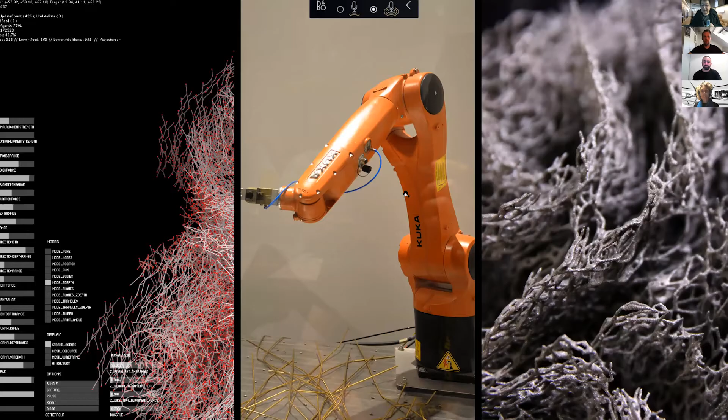So I'm going to discuss the relationship between algorithmic design processes, robotic fabrication, and the intricate architecture that this can generate. I'll look at this through the work of my practice, Studio Roland Snooks, as well as the lab at RMIT. But to begin with, I want to frame this briefly in terms of its relationship to the current pandemic and its fallout. So while I'm fairly skeptical that the pandemic will have a significant lasting impact on architectural design and fabrication, there are perhaps two implications of the coronavirus situation that are relevant to this work.

One is that the pandemic has highlighted the need for flexible manufacturing, and we can see this in the way additive manufacturing has been employed to print PPE or ventilator parts. And secondly, the disruption to supply chains. So this is emphasizing the importance of local manufacturing and distributed production rather than a dependence on international logistics. So both of these implications are going to create a renewed focus on advanced manufacturing and in particular 3D printing, and perhaps help to establish the conditions to accelerate the adoption of these tools within architecture and building construction.

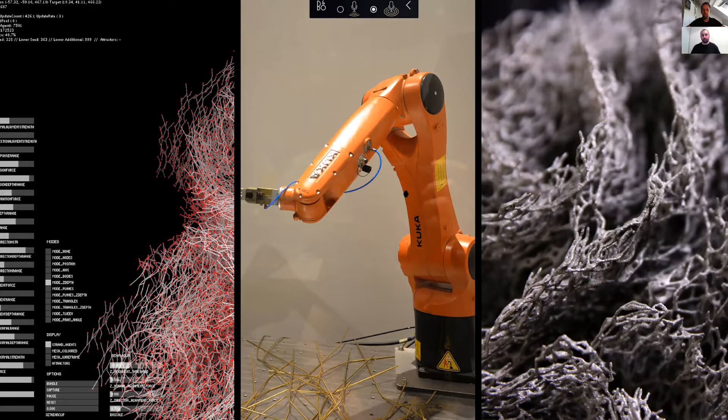So I want to just, within that framing, jump into the work, and I'm going to try and take a really fast section or slice through my work and try and describe the relationships. So methodologically, my work is based on a generative design approach that I describe as behavioral formation. And this is something which draws upon the logic of swarm intelligence and operates through multi-agent systems. And so this is an approach in which design intention is encoded into individual entities. I describe them as agents. And through the interaction of these agents, design intention self-organizes and it leads to emergence of architectural form, structure, and tectonics.

So in particular, one aspect of this that I'm going to talk about today is an algorithm I describe as an agent body algorithm. And so this is effectively an agent which then connects to other agents through a series of limbs. And in doing so, creates continuous lines of structure, ornamental effects, and structural networks. In doing so, this is an architectural design approach which creates intricate geometries which are neither really surface or network or volume, but can really be described as something which is like a thick fibrous mass.

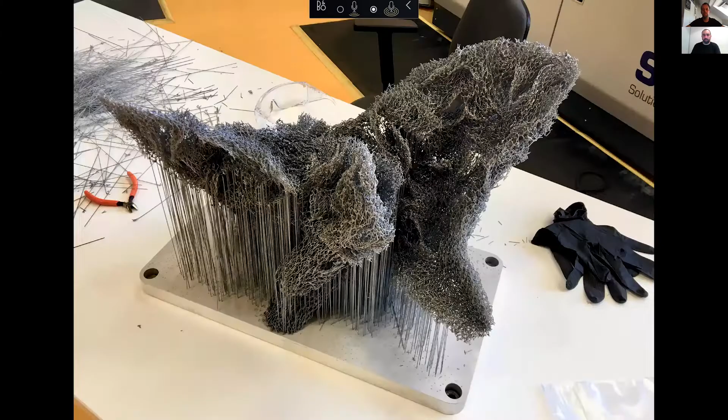And the creation of these in physical material is something that's very difficult. So at a small scale, perhaps we can print these directly. So this is an aluminium print where it's only about 600 mil across. Each element is only about 0.5 millimeter in diameter. It's over 1 million of those small elements. And it creates a series of different effects at different scales. This is a very small project we produced for the Pompidou Centre about 2 years ago. But it's part of an algorithmic inquiry we've been working on for almost 20 years.

And these particular geometries, we've been trying to figure out ways of building them for the last 7 or 8 years. And so what I want to do today is sort of show this cross-section for a series of techniques for designing or fabricating these geometries. So firstly, we started looking at these in terms of composites and the way we could compress surface, structure and ornament into a single irreducible whole, where they're interdependent. And in this case, the network of agent bodies became the sandwich material within a thin fiber composite. We did this on several projects at a series of different scales, using a number of robotic fabrication techniques, as well as more traditional boat building techniques like this fiber layup technique.

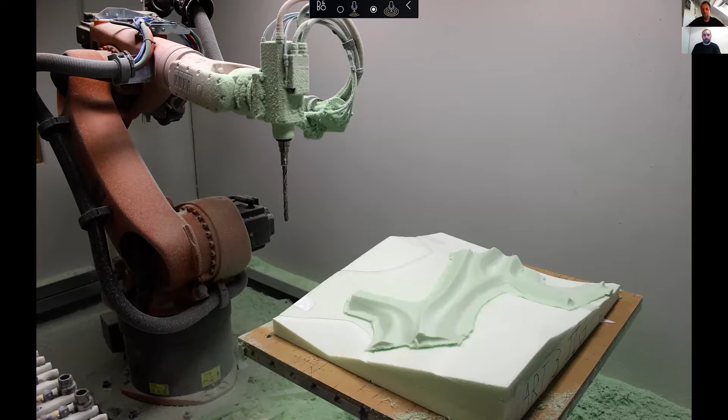They were quite complex and difficult ways of building something. We've also explored simpler ways, like using flat sheet material, which has been laser cut, and then using it to find its own form. And we've also attempted this in things like fiber composites, where we're looking at the way you can make a fiber composite without a mold.

Now, in this progression of projects, we've gone from something that was thick and fibrous down to something which becomes very thin and lightweight. So an alternative trajectory we're looking at is the way we build these agent bodies, or the lines of these agent bodies, through robotic rod bending.

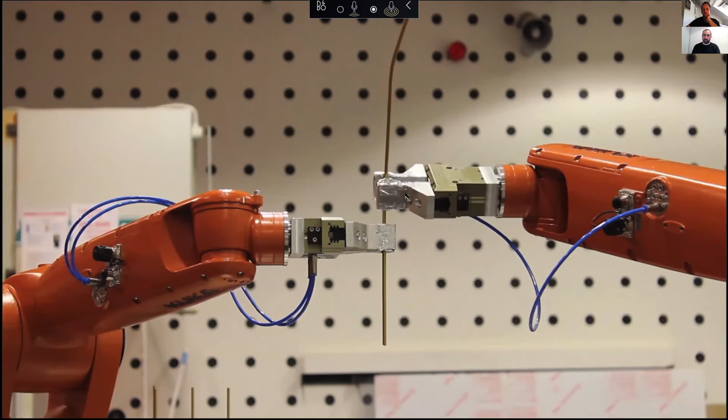And what became interesting to us in these projects was we're working with a very volatile algorithm, which is hard to refine because of the level of population it works at. So what was necessary is to understand all the constraints of the robotic processes and then build those into the algorithm, so you know that whatever the algorithm generates through this wild and volatile process, it's inherently going to be buildable within this fabrication process. So this second strategy was really looking at building lines.

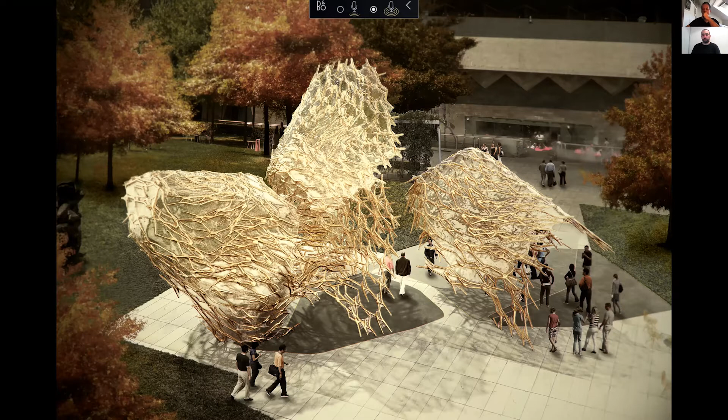So we had these two alternative problems. One dealt with surface, but no fibrous mass, and the other was all fibrous material and no surface. And it wasn't really until this project that we tried to bring those two things together. And in bringing them together, we realized that we needed to develop a different type of construction process for it. And so this is when we started looking at large-scale FDM 3D printing, and that's what I'll focus on the rest of this short presentation.

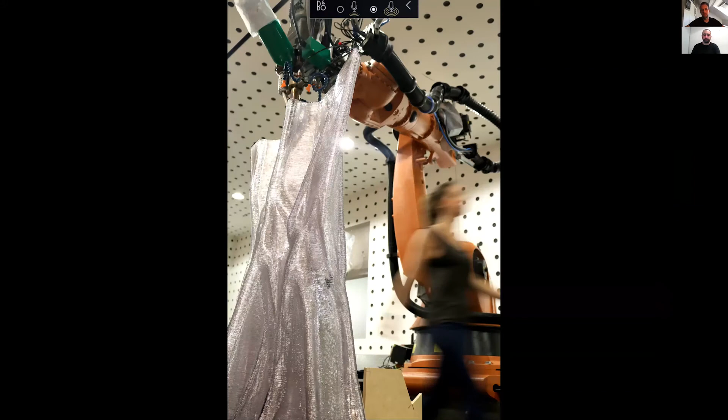And it was really a shift in the way we think about the production of this. So it was a shift from building the network of agent bodies and then trying to skin it, to printing a skin which we then cast a fibrous network into. And so in this case, we're casting fiber reinforced concrete back into a series of prototypes, both within skins and ones which were just simply networks, and testing that through a whole series of projects.

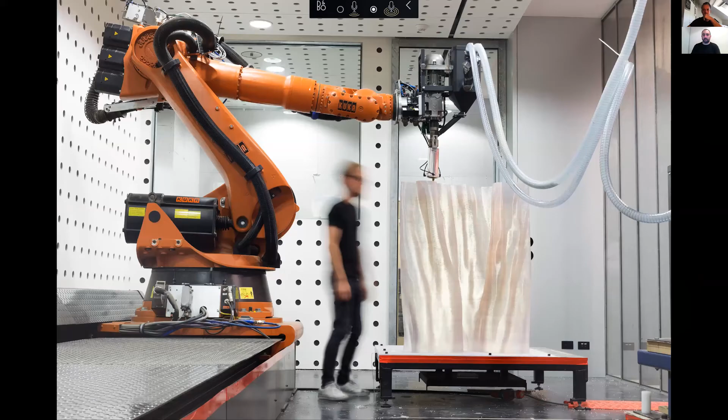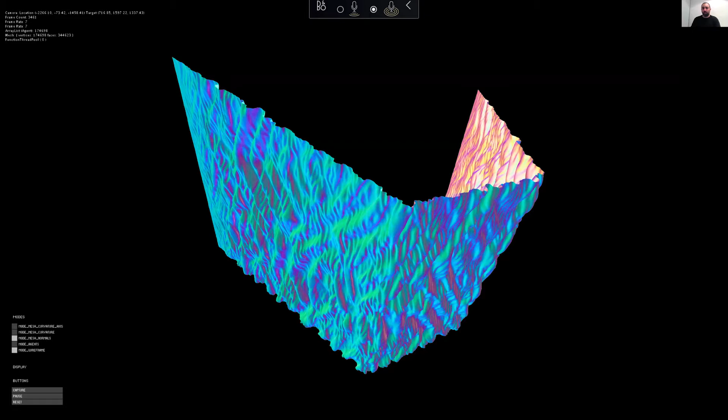But this is not really the type of geometry that large-scale 3D printing has a bias towards producing. Large-scale 3D printing inherently wants to be producing a continuous line, a continuous surface, so without a change in topology. So with that in mind, another set of projects were developed in which we were looking at a continuous surface, in this case a surface where each control point is an agent. And through the interaction of those agents, we get this rippling or corrugation.

And a lot of the challenge of building this particular project, which is out at Monash University for SensiLab, was about how you 3D print polymers in permanent buildings. Like, how do you overcome building codes and in particular fire codes? So this was the first time we had a chance to apply it to a real building. It's a small meeting room. It's an internal project, which was really about the interest in the reflection and refraction of light.

Our interest in this work is really about how you scale it up, though, and how it can tackle larger architectural projects. We had an opportunity here at the NGV. This was a collaboration with sound artist Philip Samartzis, who took a whole series of recordings from the Antarctic. And what we're trying to do with this work is trying to capture some of that atmosphere of where those recordings were taken from, and try to build this through these techniques.

So in many ways, this is a project that's about atmosphere, about the lighting effects that come through this 3D printing, and the way that changes from day to night. And also the way that this object relates to the richness of its host, the room, and the way it frames the Leonard French ceiling.

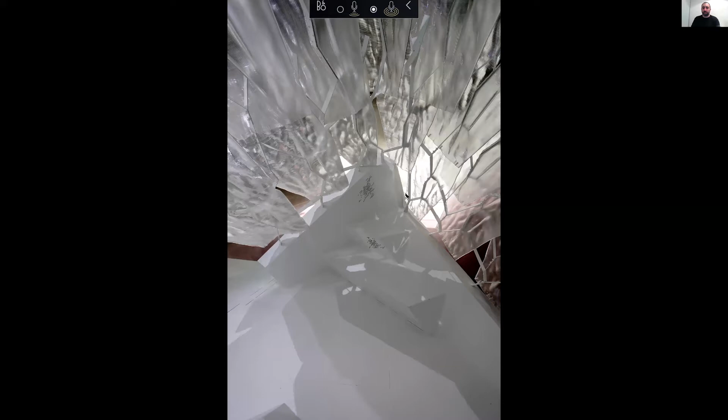So the project's made from about 70 of these 3D printed panels, which are interwoven with, in this case, a folded steel structural frame. So this in many ways goes against what we're attempting to do. I mean, this separates structure and skin, where the agent body network is the folded steel structure. And I guess since doing this project, our attempt has been: how do we start to reintegrate the skin and structure back together?

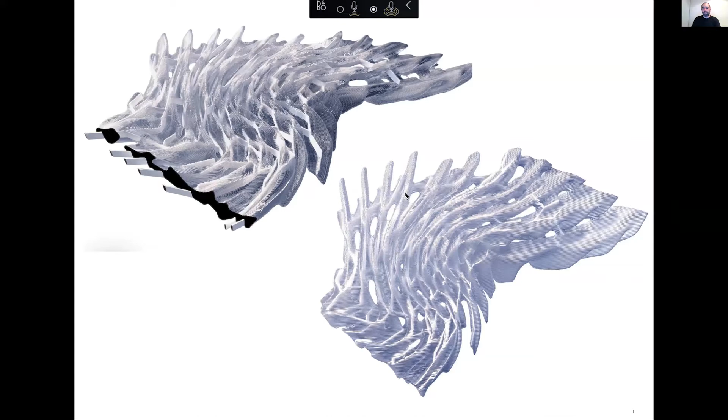And so part of this has been about, can we embed the steel structure into these plastic printed surfaces? And more recently, we're looking at other ways of embedding structure. And so this is an attempt to embed carbon fiber structure into 3D prints. This idea that we could print a series of conduits which get infused with carbon fiber and can also take up the jointing system. So this was originally intended for this project for RMIT University on the Brunswick campus. And it's the skin for several studios.

And so in this project, we're looking at how do we create a space between these walls? What is the layering of space between them? But unfortunately in that project, due to value management, the carbon fiber didn't make it through to the end of that project. But it's something we've been continuing on doing in sort of adjacent research, parallel research, looking at the way we can integrate carbon fiber structure within the printed surface.

And it was in this project we were able to achieve this. This is a project for the Shenzhen Architecture Biennale that was completed late last year. And what this is looking at is really the way all these three things come together. Like, how do we bring together structure, surface, form, and I guess the topology of form together into one irreducible element. So it's printed in a series of parts which were infused with carbon fiber, assembled, hoisted into place.

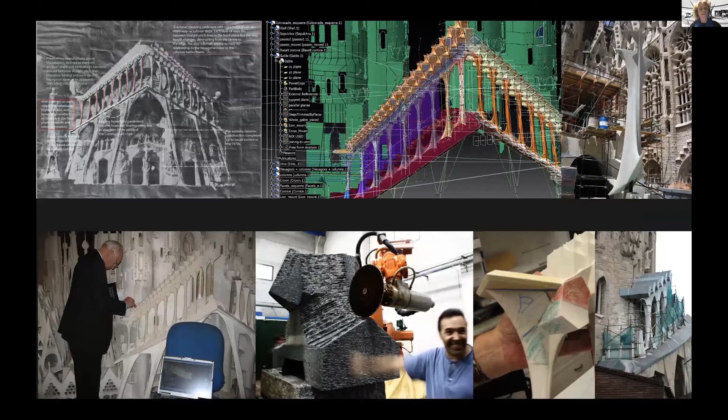I had quite an early introduction to digital fabrication. In 1980, I started studying architecture, and I'd just come back from spending a year in an ashram in South India, but I met somebody who'd just spent their year in the basement of the Sagrada Familia Basilica in Barcelona, and we later went on to be partners. So through the 90s, I got to at least see secondhand that if you could get your hands on an expensive piece of kit, like a Unix computer for 100,000, and you could use aeronautical software and didn't mind working through a programming interface, there were just amazing possibilities for architecture, and also that link between the drawing, the models, working backwards and forwards iteratively, but also to the digital models, looking at optimization and into the physical world, and how this digital technology was really joining all the dots for us.

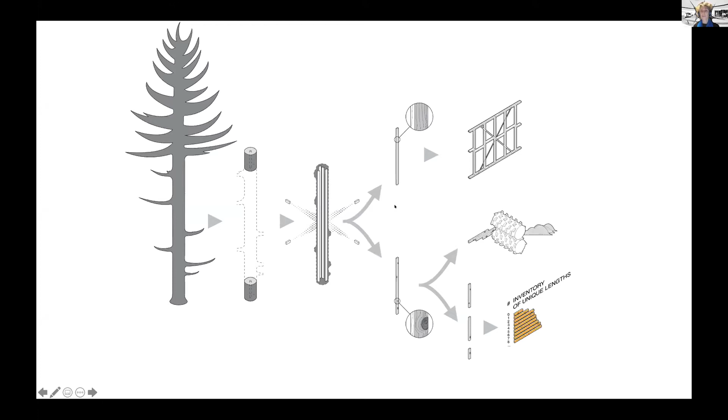So there's a huge potential there for regaining some of that material and looking at what you do with it. So we were looking at an inventory of unique lengths of the remainder after all the knots and defects have been taken out. You get a lot of scan data these days. There's really sophisticated scanning technology going on inside the mill, so you get all the data in terms of size and where the knots are.

And marry this up, back to the Gaudi story, to the flexible funicular way of modeling and looking at equilibrated structures. Could we start to look at that and, through the digital smarts and using computation for what it's good for, which is that horrible repetitive numerical crunching, get to a best fit between that random inventory of timber and a funicular or catenary fully equilibrated structure.

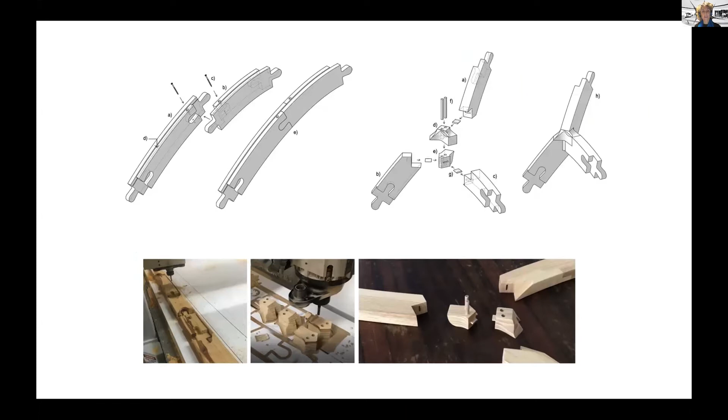So there was a lot of fun involved in just thinking about how you would detail something like that. It was originally designed to go to Barcelona last year to the IASS Form and Force competition and exhibition, and therefore had to be designed around suitcase dimensions, and then found its way back into the Future Prototyping exhibition this year. And the second project also at the Future Prototyping exhibition was FabPod 2.

So we've talked a bit about waste and the computational opportunities there. Lots of low-hanging fruit in that space. I guess the other big preoccupation has been thinking about how do you bring more real-time feedback into designing, and what does that mean in terms of tying what you make and what you design back to its impact on human sensory experience, and understanding the interaction between people and form. So this project is all about sound. It also has a link back to Gaudi.

When the interior of the basilica was completed 10 years ago and the Pope came to consecrate it, it was clear of scaffolding for the first time, full of musicians. We found out that although it's a very, very resonant space, it's also a space that has a very even sound distribution. It's very diffuse. Just as it diffuses light, it also diffuses sound. And that seemed to be something to do with the way that Gaudi's use of surfaces was scattering the sound.

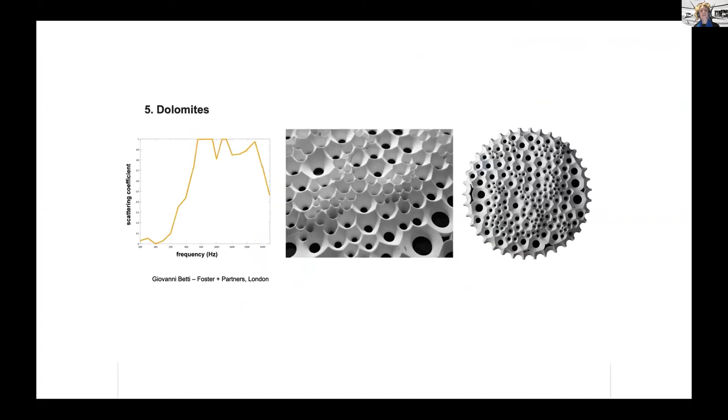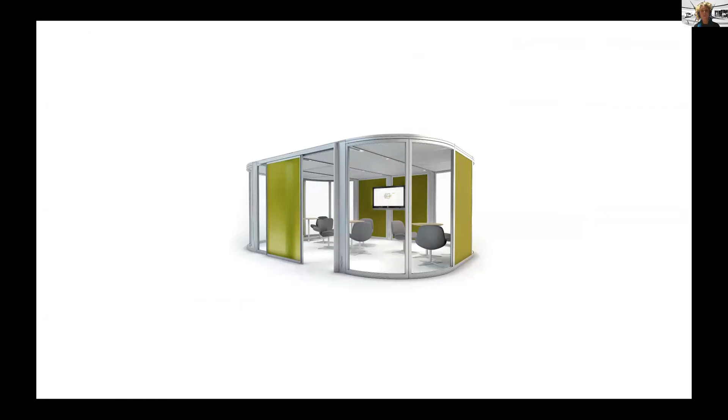So we did some experiments of our own, just to see if hyperbolic surfaces and hyperboloids of revolution in particular were great scatterers, and were able to establish that that was the case across, in some cases, a very wide range of frequencies. And then took that knowledge back when it came time to think about open workspaces and how you can hold a private meeting. And of course, if you've ever been in one of these pods, there's a hideous acoustic inside. So could we apply that? And we did that in what became known as FabPod 1, which I think is still sitting at RMIT.

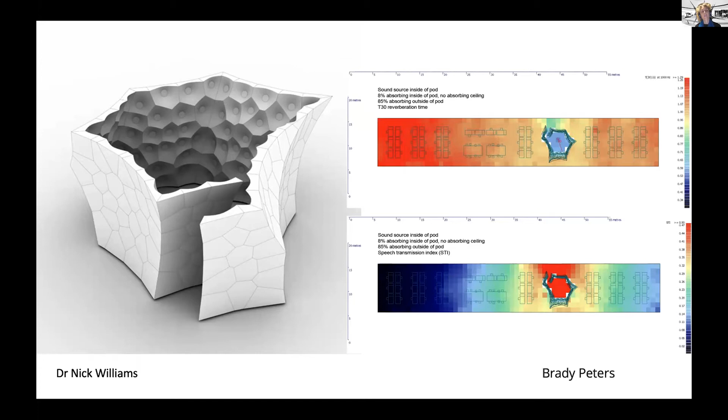So that's a series of intersecting spheres with similar hyperboloids subtracted out of the surface, using a mixture of reflective acrylic, spun aluminium, and absorbent echo panel felt materials to manipulate the sound inside. So you get this incredible clarity of sound inside, but you're actually stopping 17 decibels without having to have a ceiling or a door, which is exactly what one of those little pods does for you in terms of blocking sound.

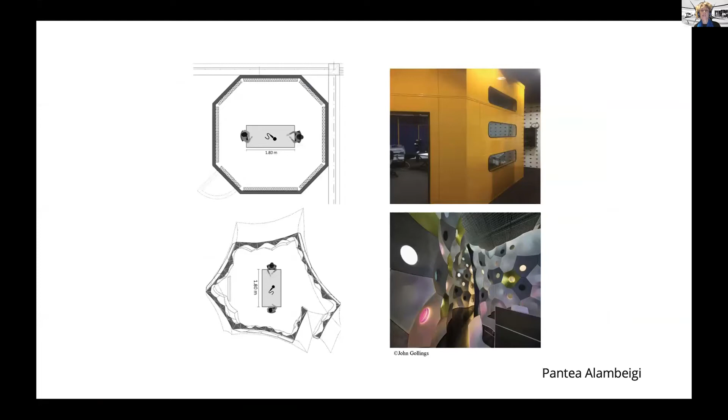And the beauty of that project was that we had it as an enduring prototype for a very long time, to look at the way it was performing and compare it to other similar volumes. This is Pantea Alambeigi, who did a whole PhD on looking at how to optimize, particularly for speech privacy. So not just the level of sound, but how you understand sound and how it disturbs you in working environments, looking at global shape parameters

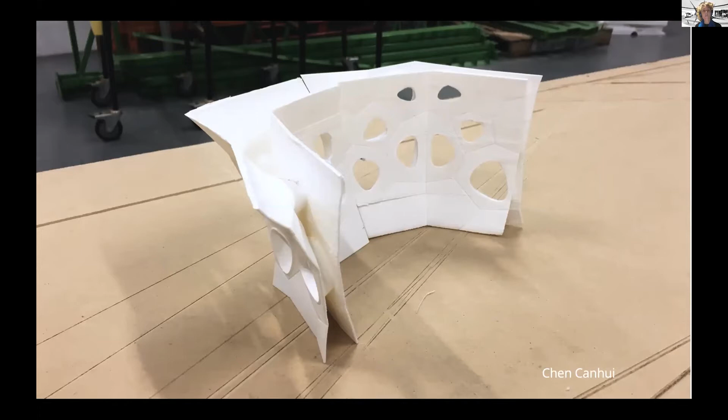and bringing that into what's subsequently become known as FabPod 2, which, although it looks in some ways quite similar to FabPod 1 with its oculi and its crazy geometries, is actually a concave shape on the inside and the outside, which is better for containing sound than the first time around. But it's also looking more into manufacturing paradigms.

So here for the framing, using folded metal, so that the precision in the system is actually built in to the way that the cells are fabricated, because we found that in the first instance, a lot of the labor and a lot of the sort of manual stuff was really tied up in the assembly, and tried to get that very high level of precision.

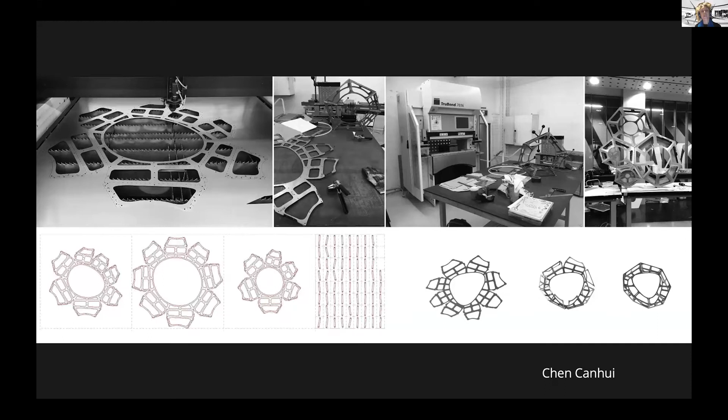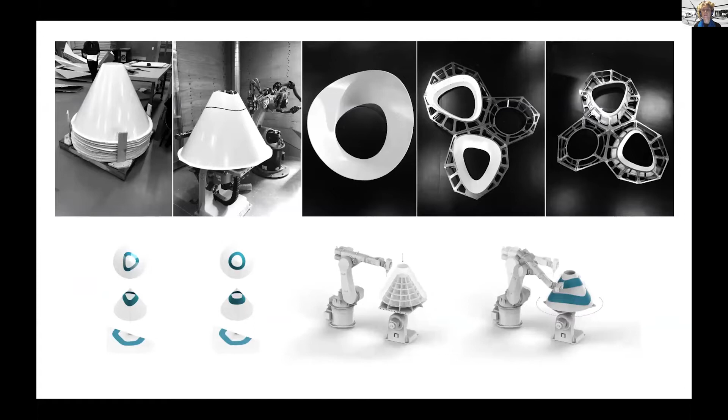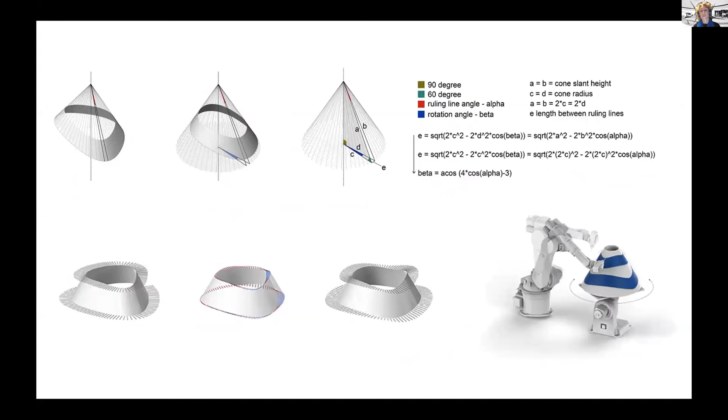And secondly, we at this point abandoned the hyperboloids, which also have quite a big cost in terms of manufacturing, to use a standard ABS conical shape. So you use one mold, make many ABS cones that can be distorted, and using kind of reverse projection, squashing those cones, cutting them with the robot along a calculated trajectory, and then pressing them onto a plane. So each one again becomes unique.

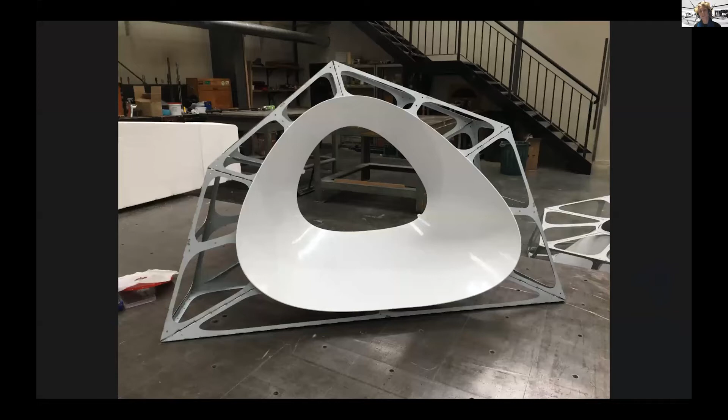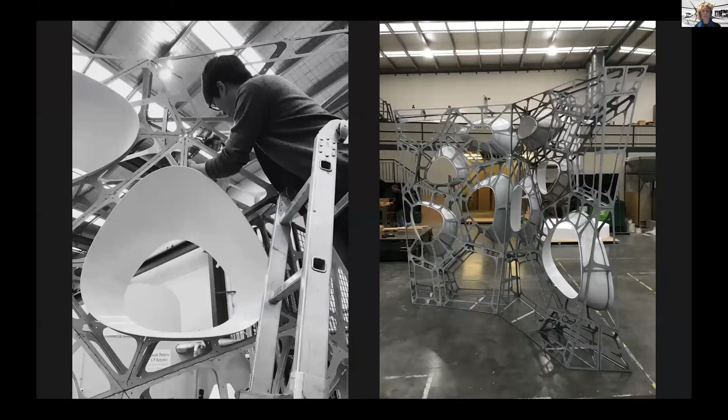Again, it's an irregular shape that's doing the sound scattering within the space, but it has some sort of affordances and some kind of manufacturability. So it's on its way to a much closer manufacturing paradigm. There you see Chen Canhui up the ladder, who led the fabrication drive and took many privileged students, initially from RMIT and more recently from Swinburne, on that journey. And there it is in the exhibition.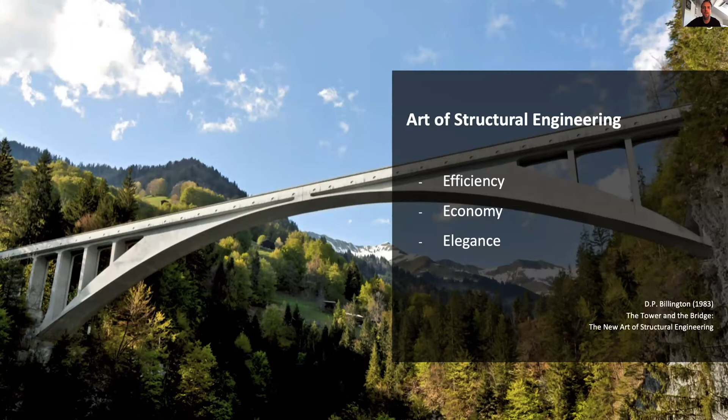I want to frame this small introduction by starting with David Billington's coining of the term art of structural engineering, where he boiled it down to caring about efficiency, economy, and elegance. Efficiency has to do with responsibly using a material as well as possible and placing it where it wants to be. So master builders like Robert Maillart used graphic statics, for example, to discover these forms and to not disconnect the design step from the engineering step.

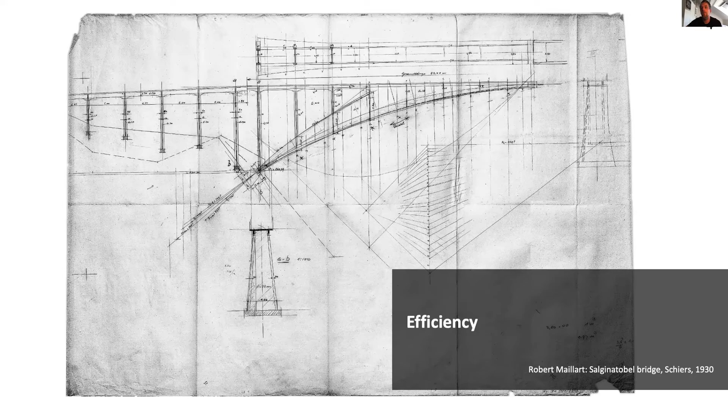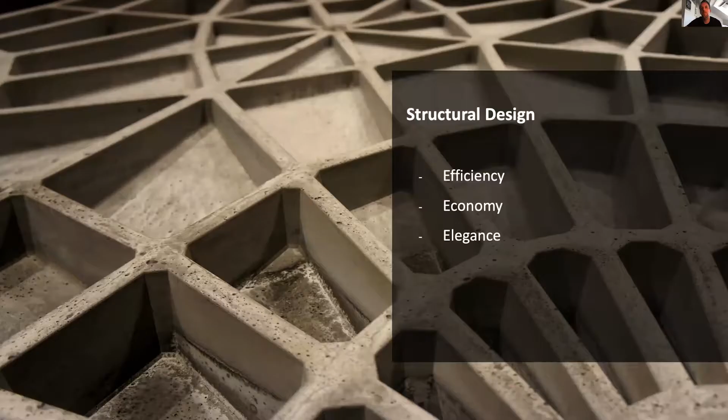Economy has to do with obviously the bottom line, how much things cost, how it is realized, and thinking directly of construction from the beginning in the design process, or fabrication as well. And it was interesting that these master builders explicitly talked about elegance as an extremely important target to aim for. So if we talk not about the art of structural engineering but the goals for structural design, I think these three goals are absolutely essential.

But nowadays I would add ecology and ethics, and I will talk a little bit about what I mean by that. My group tries to clarify that a lot of these targets can be gotten almost naturally for free with good geometry, so that we get strength, stability and efficiency through the geometry of a structure.

And indeed, Jane talked about funicular shapes, the shapes that Gaudi explored. If you extend these shapes, then you can use very humble materials without the need of any reinforcement, glue, things that actually make structures last less long. So here, for example, a cut stone vault.

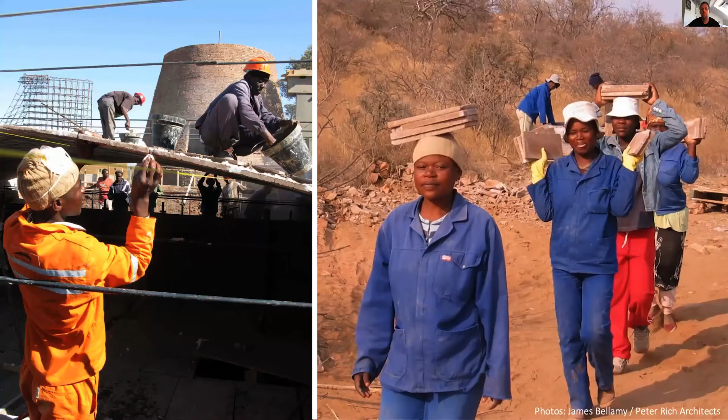When you get the geometry right, then you can activate local resources, so locally sourced soil that is just compressed without any firing, and that can be assembled just with local labor. Very weak materials, and weak materials typically have low environmental impact. But you could, and these are more postulating, the first are real projects.

This is more a provocation, a pavilion that uses compressed waste, compressed Tetra Pak, to again show: why are we not thinking in these types of materials? So going beyond local, going towards recycled materials, and why not even grown materials? And I'm excited that we just got funding, through a small research project, to really explore. These are, for example, fungi, mycelium components. So should we not start to explore to what extent they really can be used as structural components?

To discover these kinds of forms, my group develops tools that we share for free that allow you to discover, explore, and also understand why and how these forms work. And so this openness, this responsibility of sharing, I find very important. I am very happy to say that next week in the Digital Futures workshop, we will officially launch RhinoVault 2, which is a more sophisticated version to explore and discover these funicular, beautiful, three-dimensional, robust forms.

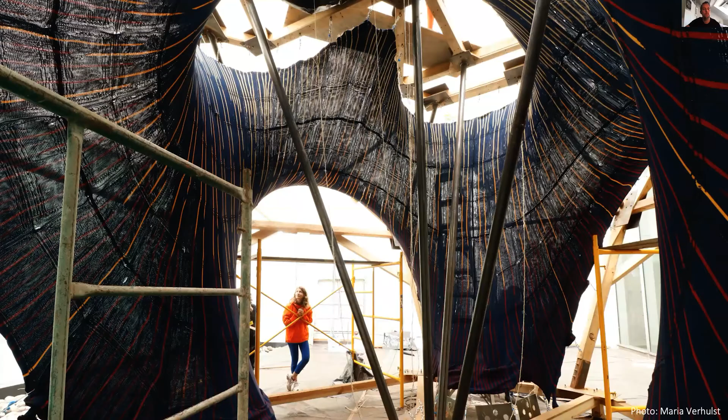But economy, we also want to then realize these forms in a way that we can start to challenge the status quo. And that is why we do research like, for example, this knitted formwork that was produced on a standard knitting machine, typically meant to make sweaters or braces or things like that. And then this entire formwork, much like Jane was saying, could then be transported on site, just in some suitcases.

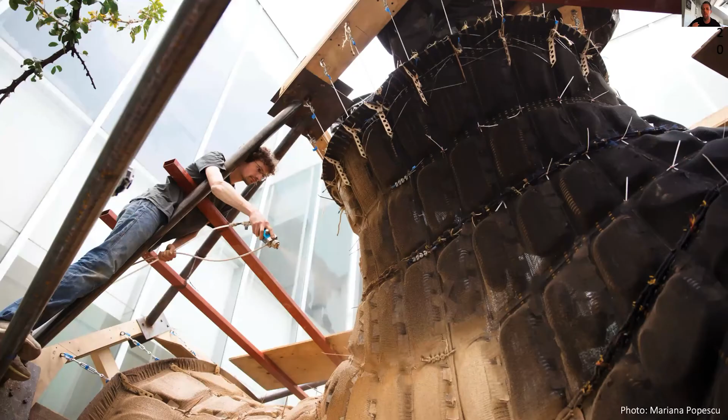And then, not unimportant, what is the relevant level of introduction of computational and digital fabrication here? Doing all of this prefabrication to then on site, this was in Mexico City, be able to work with the crafts concrete finishers. So literally giving them a more interesting canvas to work with. So this balance between the appropriate level of control, of introduction of new methods, but also respecting the opportunities and the strengths of local crafts, I find a very, very important and interesting topic.

And of course, the bigger socioeconomic context needs to be considered, because it's not just about the money, it's also about longer term benefits and opportunities. So this was a shell that we built in Mexico City that we designed together with Zaha Hadid Architects. What you don't see is that it's a complicated rib stiffened shell, so a very complex geometry that was done with a formwork system that costs literally less than 4,000 Australian dollars.

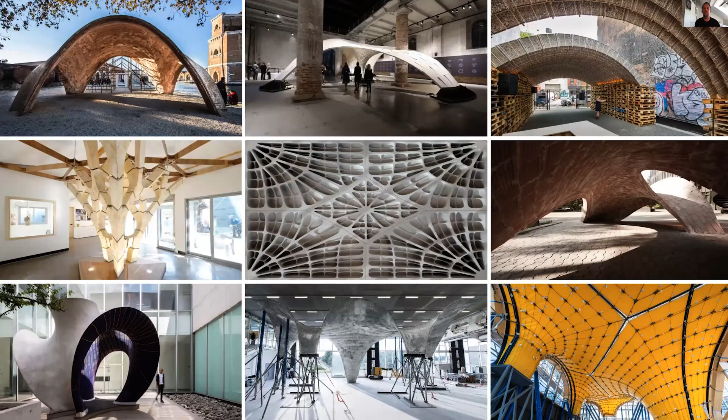So here trying to really challenge ourselves, because unfortunately this beautiful, efficient, curved structural geometry is not standard geometry, and hence typically is associated with a lot of cost and or waste to realize. And so this is something that we try to push. This is, of course, entirely subjective, but I would argue that if you get things right, if there is a connection between the forms that you generate, the materiality, the fabrication, the specific approaches, there is a natural elegance that emerges.

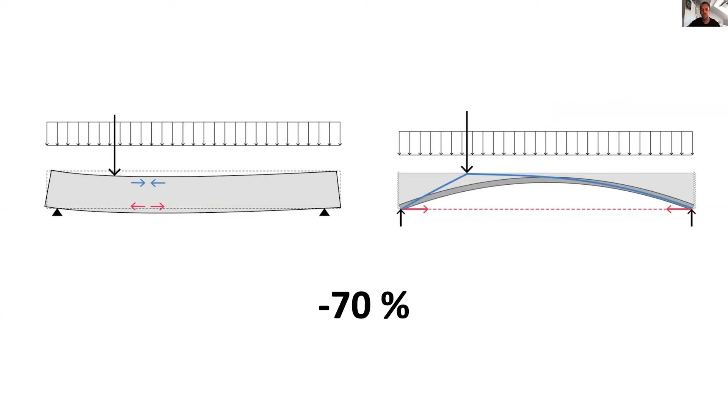And here, for example, what I'm showing on this slide is that concrete is actually by itself quite a good material, it's just how we use it in bulk that is absolutely irresponsible and bad. And just by reintroducing old techniques, learning from the past, the stiffened arch rather than a beam: concrete doesn't want to go in tension, so it doesn't want to act like a beam, but it wants to act as an arch that is being kept together with a tension tie. Then we save for free more than 70% of material. And indeed, we are now demonstrating this, and you see through one of the early prototypes broken how much material you can really take out.

Then towards ethics, there's two aspects in ethics. I think we have a responsibility to indeed tackle these problems, and we all need to work together. And that is why we develop computational frameworks, for example, COMPAS, that allows really to share knowledge amongst researchers, and increasingly also to start to have a very effective way to work together with industry.

And that is another aspect about ethics, is that we cannot pass on responsibilities to others. We cannot expect engineers to not challenge architects. We cannot expect the efficiencies on site just to come from the fabricators or the contractors without involving them in the design in the beginning. So we need to rethink how we work, and that's also where computation is really essential, and we need to rethink indeed the sequences of how a project comes to be.

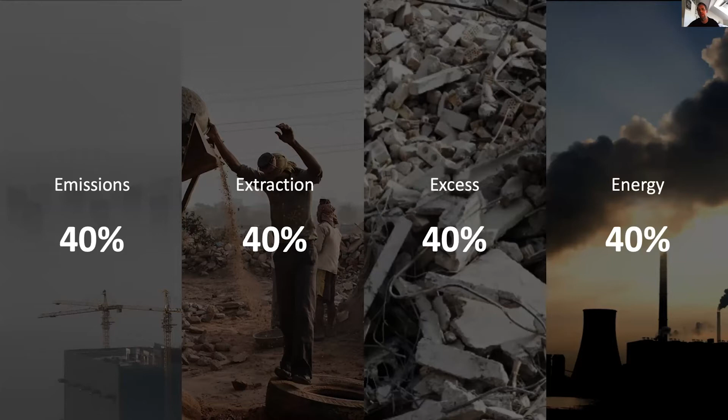So to remind you where I come from and the key things that I believe that we still should challenge, and where this topic is so important, the topic of a more integrated design process without the borders between disciplines and passing on of responsibilities and fee control and so on. But I think that indeed we can achieve that by redefining what efficiency is.